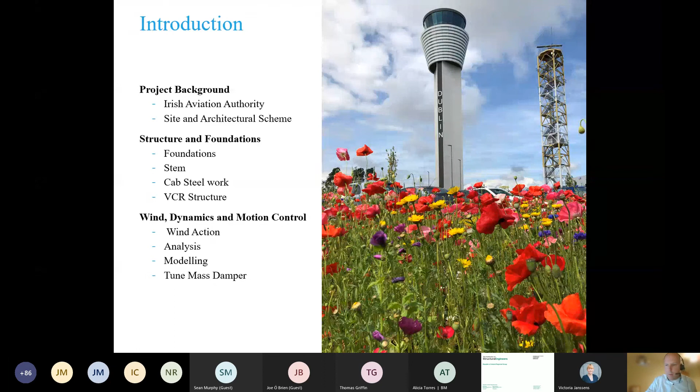In terms of the client, the Irish Aviation Authority, they're a commercial state-sponsored company. The Irish Aviation Authority control all the aviation space around a large swathe of the Atlantic - 450,000 square kilometres of airspace - and they effectively control 90% of the east-west aviation route between Europe and America. It's a very important air traffic service they provide. They also regulate safety standards in Irish aviation and provide safety consultation to aviation authorities globally.

Before that, in terms of the purpose of a visual control tower, the nature of air traffic control work is in two parts. One is...

Sorry, just getting some feedback there. Thanks, on mute, thank you.

Air traffic control is in two parts. You've got the guys who cover air traffic from navigation systems, and then you've got the visual guys who work from the control tower and control the space around and above the aerodrome. Once a plane comes in close to landing or taking off, they're transferred over to the VCT guys. They not only rely on navigation systems, but visual contact is very important for an air traffic controller, hence the need for a good quality air traffic control tower, especially in a very busy airport. The primary objective is to maintain appropriate separation between aircraft.

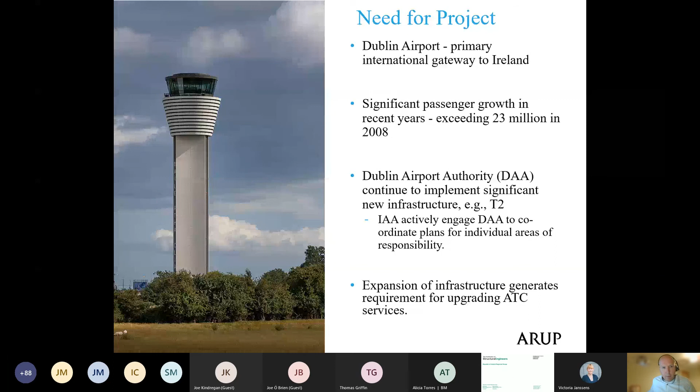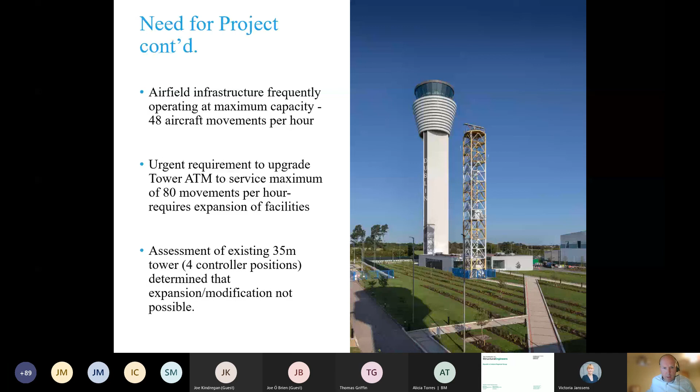The number of air movements per hour was about 48 at that time, and they were now looking to move to an 80-movement-per-hour facility. The question was whether the existing tower at the aviation authority could work with this new demand for increased flights, and the answer was clearly no — they needed a new tower.

So the Irish Aviation Authority launched a competition, an architect-led competition for a new tower. It was a very good brief, but some of the key words from it: it had to be safe and efficient, a unique and world-class visual control tower, with an optimum working environment.

The Irish Aviation Authority really put a lot of investment and value in their air traffic controllers, and they wanted the best-in-class facilities for those important workers. They also wanted a tower that would respect the relationship with the wider environment — the existing control facilities, the wider airport, and the area and vicinity around North Dublin.

They wanted best-in-class ATC service and a unique identity for the tower, not something overly elaborate. There are lots of very elaborate control towers at airports around the world, but the brief was for something simple and elegant that provided a focal point for people arriving in Dublin.

So the team did quite a bit of benchmarking, looking at international facilities and control towers, and a number of projects were examined. Arup had just completed the new control tower at Heathrow.

This was a different type of tower, and its structure was largely dictated by site conditions. The cab was a good example of a good facility, a good and workable design. The team looked at this project in detail, and that started the concept for what we were doing in Dublin.

I'd like to acknowledge the key input from our aviation team in the UK, particularly led by Richard Matthews. Richard has led our global aviation business for some time and has recently retired. I want to take the opportunity to thank Richard for his valued input into this project — he's mentored the team and always been available to give us the best advice. Our team and our client really appreciated that, and I want to wish Richard the best of luck in his retirement.

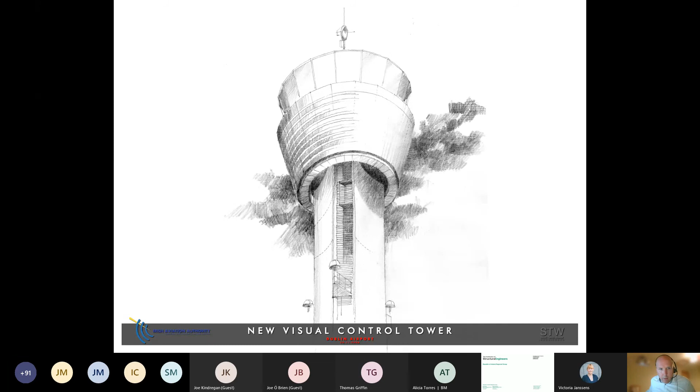These are some images of the Scott Tallon Walker design scheme — some of the early concepts, sketches done by Michael Tallon and David Cahill at Scott Tallon Walker, including early concept sketches through the pavilion building, looking up at the tower.

So just a little bit about the site itself. It's located close to Dublin Airport, and in 2006, when the need for the control tower was emerging, the Irish Aviation Authority undertook a study of optimum sites and a number of options, as well as the height of the tower, given the position of the new runway and the expansion of the airport. That study determined the height needed to be about 80 meters, centrally located in the airfield, and close to the existing air traffic control facilities was advantageous.

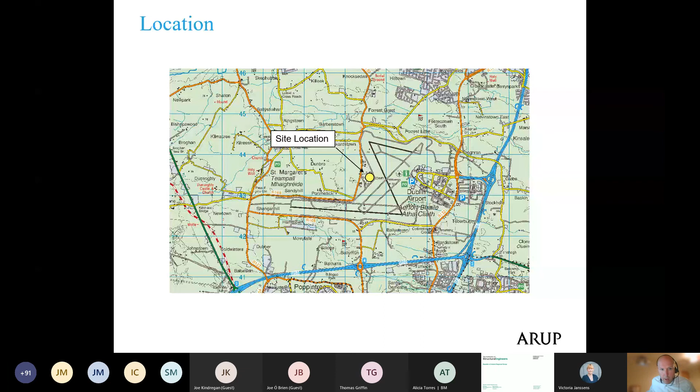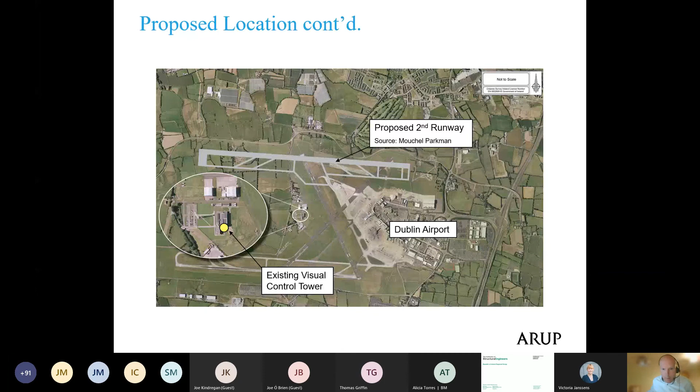So the site chosen for the tower, as you can see the yellow dot in the middle of the screen, is directly beside existing conditions, and centrally located close to the existing runway, and very central to the second runway nearing completion on site. So it's centrally located in the airfield, giving good optimum sight lines across both runways and the aerodrome, or the area around the terminal. The other advantage of that site is that it's all landside at the moment, which is hugely advantageous to anyone working in airports, as going airside is a whole different set of difficulties from a construction point of view. So it was great that we were able to do that on a landside site.

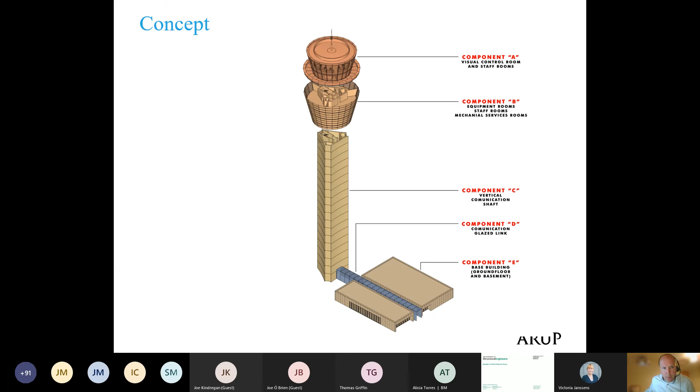Then to describe briefly the architectural scheme, there's a number of components. The first is the base building, which houses predominantly a lot of the plant and equipment for the building, but also has manager offices and meeting rooms. That's linked by a tunnel, a services tunnel in the basement, and a bridge at the upper level, to the vertical communications stem, which supports the cab, containing a lot of the M&E plant for the upper VCR room, some staff facilities, toilets, meeting rooms, and then the upper VCR, which is where all the magic happens in terms of air traffic control.

Then in terms of the plan, in the basement of the pavilion building a lot of the plant and equipment is located, linked by service tunnels and service risers up through the stem and up to the cab. There's quite a lot of plant and equipment here because of the critical importance of this type of building, so if a system goes down, there's always a backup system, and a lot of protection to those systems as well.

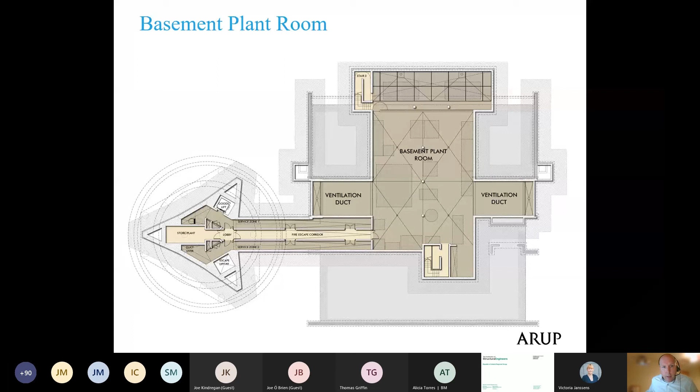So a lot of flood protection around the building was introduced. We raised levels and bunded all areas going into the basement, and within the basement, if there's any kind of leak, there's a number of pump stations to get rid of any water that leaks in. So lots of safety systems built in.

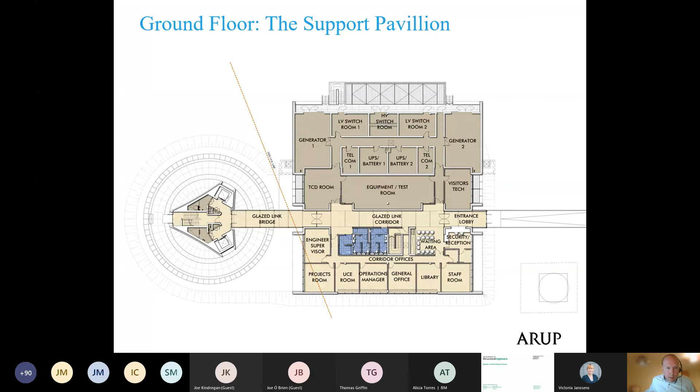And then at the ground level, you've got electrical equipment, backup electrical generators, meeting rooms, and the link bridge back to the main stem of the tower. The main stem then has two lift shafts, stair core, service risers, and circulation space.

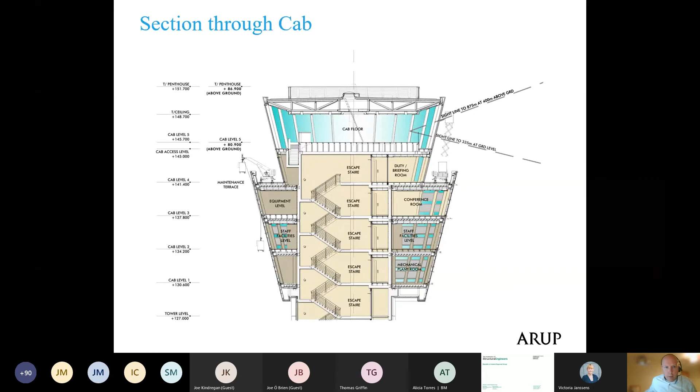And then at the upper section of the tower, you've got the VCR at the very top, with optimum sight lines set to the runway and critical points in the aerodrome. Below that, you've got security to access the VCR room, meeting rooms, and toilet facilities. At the level below that, various staff facilities, and at the lower levels, plant and equipment, and also IT racks supporting the vast array of IT equipment up in the VCR room.

I'm not showing all the plans at every level, but this is just a layout of what the VCR room looks like. It has 11 stations for air traffic control staff, and within the center area you've got the watch manager station, which looks out over the operation of the room, linked by a stair from the lower levels.

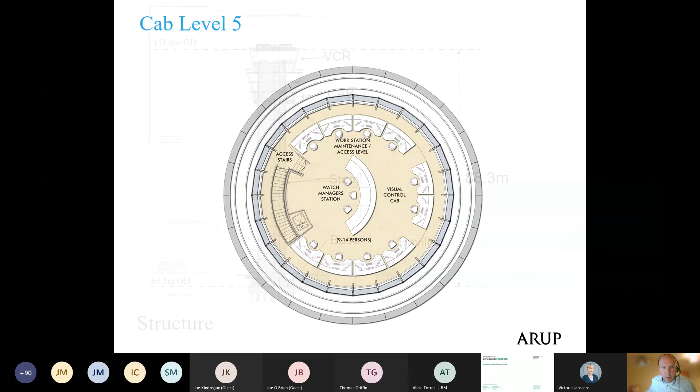Moving on to the structure scheme, the building itself is the base building, which is the pavilion - a single story flat slab structure over a single level basement, linked by a basement corridor and a link bridge. You've got the stem of the building, or the concrete stem, which rises up and supports the 4-level cab structure and the 2-level VCR structure above that.

I'll just describe those individually in the next few slides.

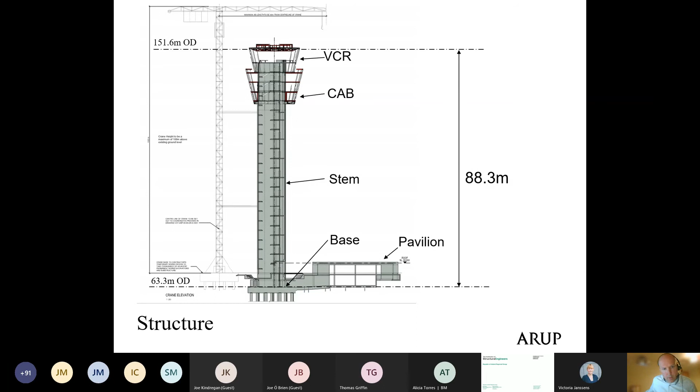The tower itself is 88.3 meters from the top of the raft foundation to the top of the roof steel, which we believe makes that currently the highest occupied building in Ireland - I'm sure it'll be soon overtaken. The tower crane used to construct the building was a 100-meter tower crane. It was self-supporting, and the position of that was carefully located and agreed with the regulator and the aerodrome or the DAA staff as well, to ensure it didn't affect any of the flight paths in the area.

We then backed that up with a geophysics investigation and some rock probing to look at the condition of the rock. What we found was that the rock head was really variable across the site in a very short distance. Aligned with that, the top of the rock was weathered, but also layered with a lot of bands of mudstone. So what we concluded was it was in a geological feature, an area of two different types of rock meeting, and it probably wasn't the most ideal site to be landing an 88-meter tower, but we had to come up with solutions around how to get that to work.

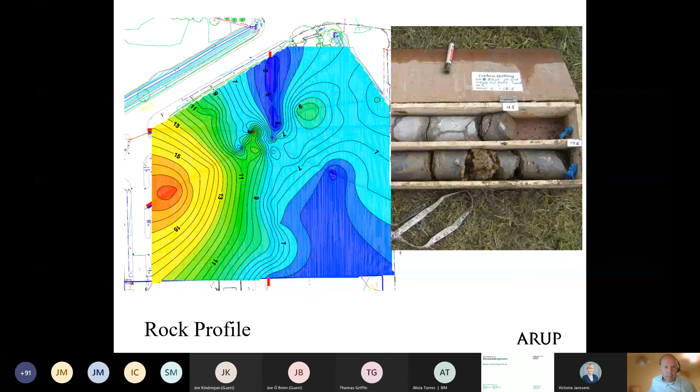So the idea was that we would over-drill the piles into the rock to make sure we got into a very good base layer. We also had an RE on site, and his basic job was to inspect the base of every one of those piles that went in. A camera was dropped down. If there was any doubt about the condition of the rock, probes were put down through the rock to further check the condition, and if we had to drill further, that was instructed on site.

The slide here shows on the bottom left the varying lengths of the piles over the base of the tower. Some were in the region of 5 to 7.5 meters. At the greatest, the highest length, I think they went up about 20 meters. Whilst from a basic load carrying capacity that was something solvable, it did come into our reckoning around the dynamics of the building, which Salam will go through with you in a few minutes, and how to model that. It became quite tricky, and it was important that we got that right.

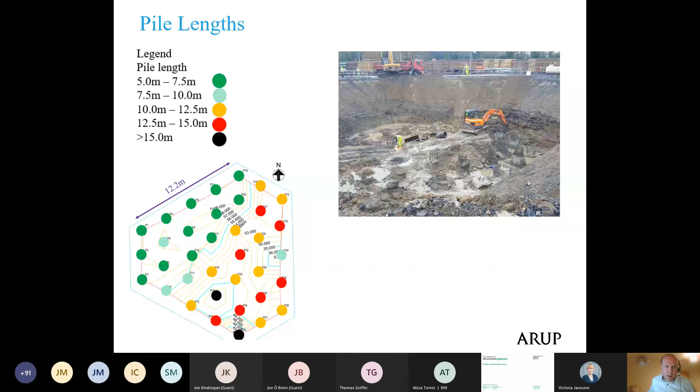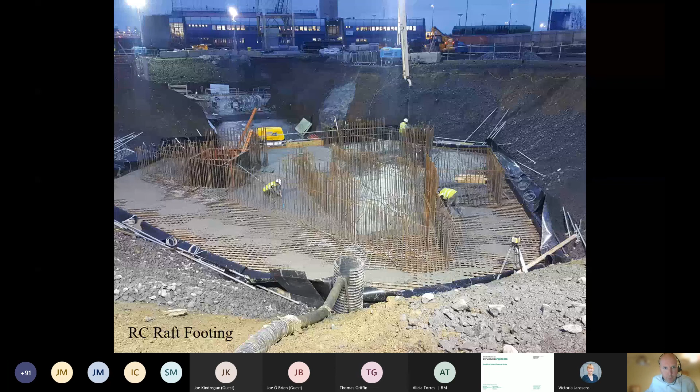So then the stem base is wider than the actual stem itself, and the reason for that is we wanted to try and transfer load out to more piles to actually stiffen the base and to really reduce the movement and control the highest stresses. You can see the dotted line is actually the profile of the stem as it's coming out of the ground, with the stem itself, and then coming in from that inboard at ground level.

Then the stem itself, at its minimum, the external walls are 300 mil thick and the internal walls are about 200 mil. The design itself, or the geometry of design, worked out very well because we ended up with these triangular shapes at the extremities, which is really where you want them from a point of view of stiffening up the stem and controlling that motion, and you have mass in the high stressed areas of the structure.

Some other points to note is that the walls themselves were not straight. There was a curvature, I think a 52-meter radius curvature, so that had to be built into the formwork for the tower.

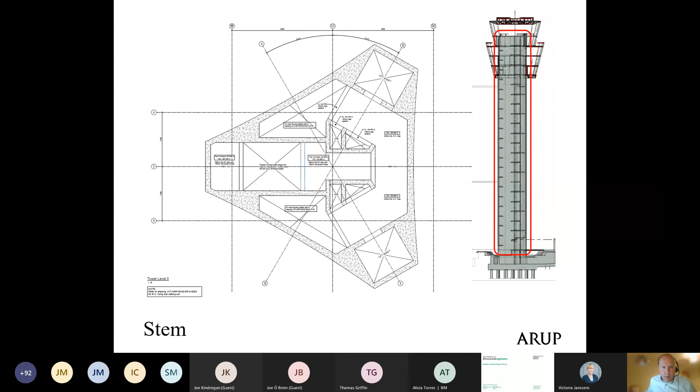So the stem itself, these are photographs of the stem under construction. It was a slip form construction, and we worked with the contractor to design the reinforcement to allow the slip form to go 24/7. Once it started at the bottom it kept going from bottom to top, at a rate of about 6 to 8 meters per day.

We also worked with the contractor to have a number of different types of concrete grades available. If they wanted to slow down the rate of the slip they would introduce a different mix, or if they wanted to speed it up they'd have a number of different mixes to match the speed they wanted to go at.

As the slip form was moving, it was also laser guided from a point of view of tolerance. I think in the end we got it within something like 10 mil of tolerance, which was amazing for the height of the building.

The other thing that happened when we were slip forming, with just the last few meters of the tower getting to the top, we got hit with a really bad snowstorm. Whilst the cab itself was heated, the slip form was heated and temperatures within it were being controlled, we just couldn't get a supply of concrete to the site, and they had to stop it for a few days, which was unfortunate because stopping and restarting a slip form is quite an operation. That was just a piece of bad luck on the project.

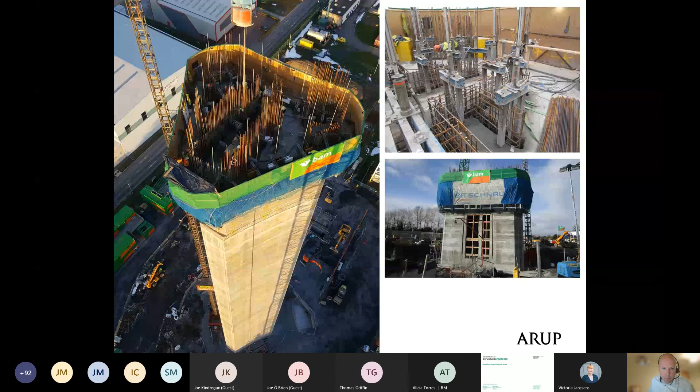So moving up the building into the cab structure, which is the 3 levels at the top of the tower here.

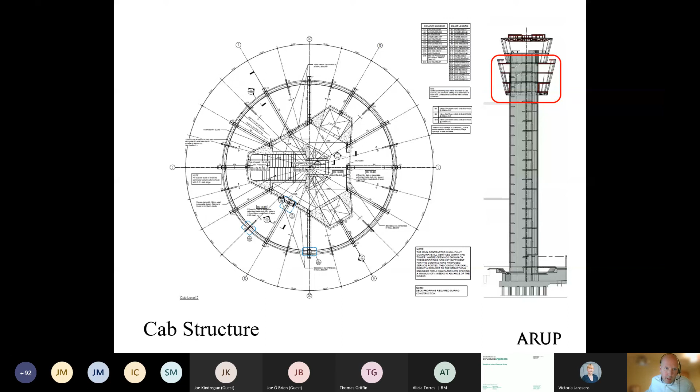The cab structure itself is a series of 12 Vierendeel girders that are cantilevered, story-height Vierendeel girders that span from the concrete core wall out to the outside ring, and in cross section...

That's just the basic structure you can see, this is the core wall on the left with the story-height Vierendeel girders spanning from the core and then transferring load by means of push-pull back to the core walls, and vertical load transferred to a corbel located at this point, radially located around cab level 1, as we call it.

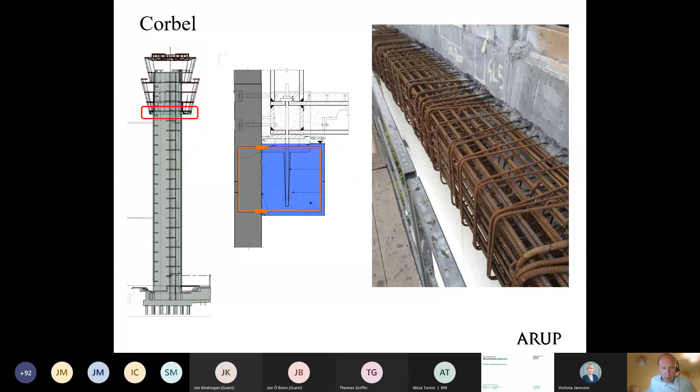The base of the Vierendeel is supported by this corbel, and because we went to a slip form type of construction, we had to come back and cast that corbel after the wall was constructed. So we had to come up with a detail to include couplers within the wall, and then stitch on a series of U-bars back into the core wall once the slip form was complete. That design is meant to load back into the core once the weight of the structure comes on.

In terms of the design of the steelwork, because of the nature of the building, we determined that from a redundancy point of view this was a consequence class 3 building. The consequence of a member failing meant we had to look to alternative load paths to make this work. We looked at what would happen if a corbel failed, or a portion of a corbel failed, or a section of a lower Vierendeel collapsed - where would the load go?

We ended up coming up with a solution to introduce, for the redundancy case, a second Vierendeel at cab level 2. So in effect we ended up with a double Vierendeel, such that if the lower one collapsed in a redundancy case, this upper Vierendeel would actually work and support the building. We also introduced a series of vertical braces in the external perimeter to allow the lower level to work as a kind of ring beam that would also transfer that load.

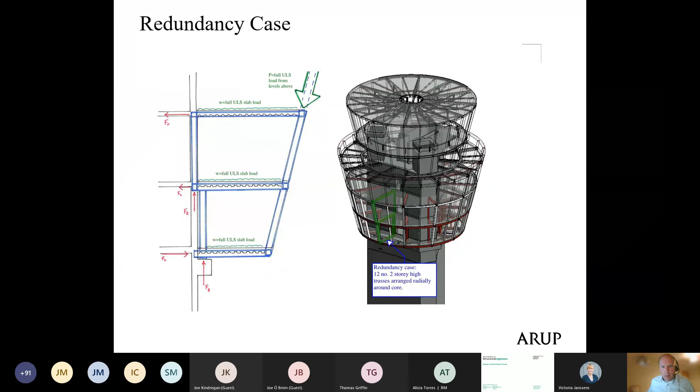So just looking at what that looked like from a fabrication point of view, we had our base. This is the base Vierendeel, which came and was bolted together on the ground and lifted in place, which I'll show in a minute.

This transferred the load vertically, pushing vertical load down at this point, and then a push connection back to the wall, and a pull connection at the top, achieved by means of a welded connection to a cast-in member in the upper wall. A second Vierendeel was then bolted and welded at the top here.

These were site welded connections, which took a lot of work and detailing to get right, and every one of them was fully tested on site, all the welds, with a lot of quality control put in place to make sure that they were right, and the weld procedures were fully signed off.

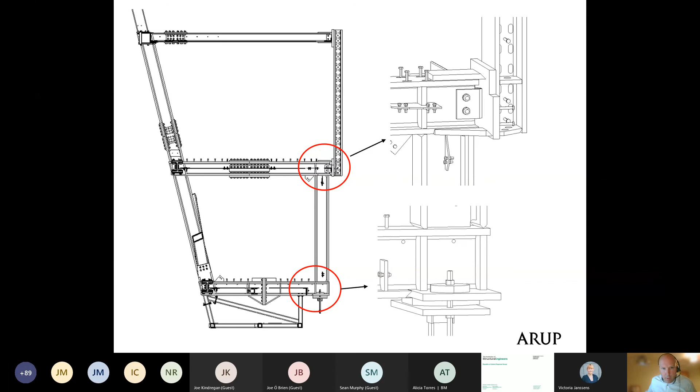This is actually the base of the Vierendeel as it lands on the corbel, and again we wanted to ensure that load was located right in the center of that corbel. We didn't want it off center, and also as the load comes on, we wanted to allow that rotation to happen without introducing additional moments on the corbel.

So we introduced a curved bearing plate underneath the connection point to ensure that we controlled how that load was applied onto the corbel. And the detail then also allowed for tolerance, in or out, or up and down, to get it exactly right.

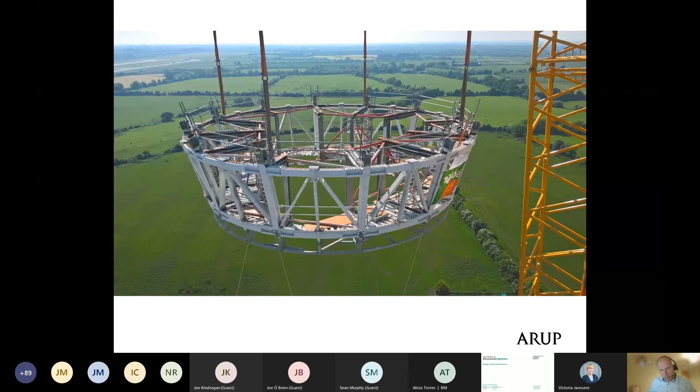This section was then lifted in one unit, lifted up over the top of the tower and dropped onto the corbel. Again, we looked at a number of analysis cases on that to ensure that ring didn't move out of place as it was dropped in, that it was stiff enough to do that job without going out of tolerance.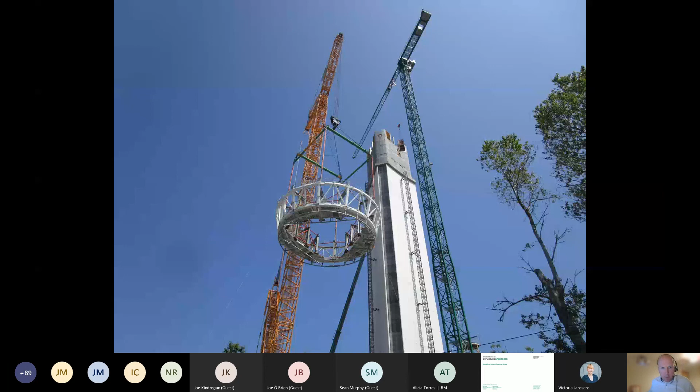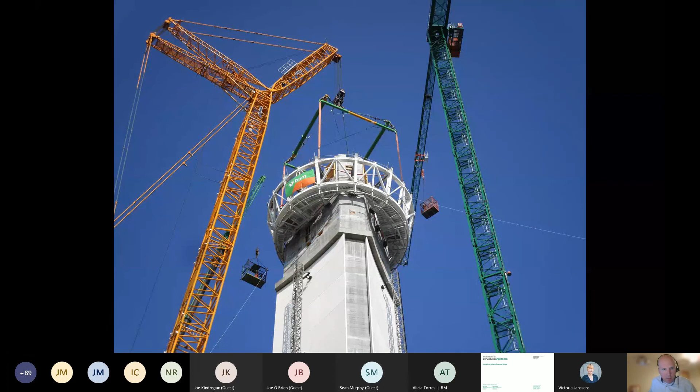Again, this was more photographs of the ring itself being dropped down and guided into place onto the corbel. Once that was in place, the next section of Vierendeels were bolted onto the lower one and then welded back to the concrete core.

And then the next lift of steelwork for the cab was then bolted above that, and that formed the levels of the cab.

Then moving up from there, we have the VCR structure, the upper cab and VCR structure. The structure itself for the VCR consists of 24 300 by 200 box sections. They were fabricated box sections rather than off the shelf, and there are reasons for that, which I'll come to in a minute.

There are 24 inclined columns which support the roof structure above. Those columns are supported on transfer beams, which span from the central core back out to the lower cab structure and Vierendeel trusses below.

The roof structure itself of the VCR room is an 18-meter span roof structure, with trusses spanning from inclined column to inclined column, with a central ring beam in the middle to enable the connections to happen, but also to allow an opening to access the roof above.

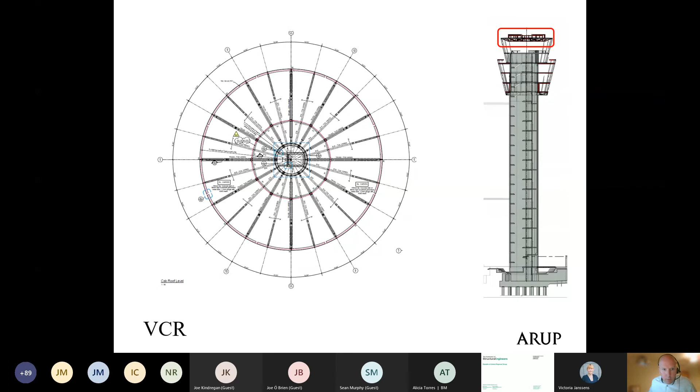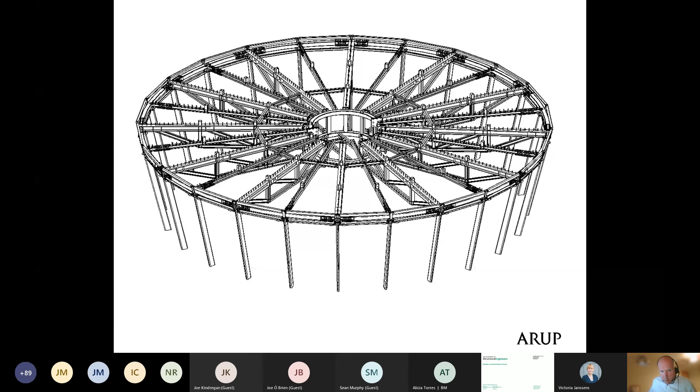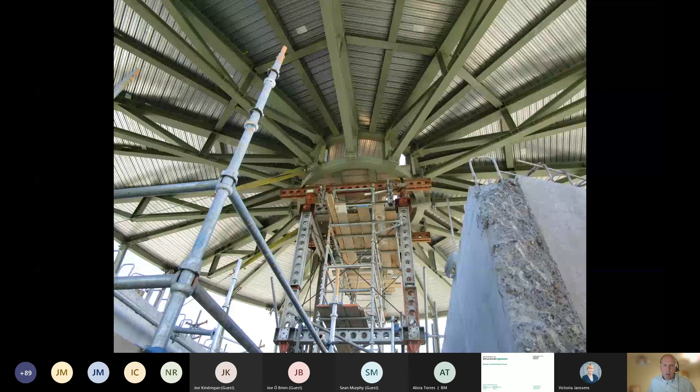It was difficult to find an actual image that showed the roof structure, because once that was in place, the contractor put a deck system underneath to allow them to start to fit out the array of ceilings, lighting and services that go into this structure. So it was never really opened up as a wow moment to look at that steelwork.

But this is kind of what it looks like now. These are the inclined box sections - 300 by 100 box sections, sorry, I said 200 a minute ago - 300 by 100 box sections supporting the roof above.

Now, these box sections are really important because not only do they support the roof and laterally support it, they also support the glass for the building. You'll see there's no mullion there, so the tolerance on that steelwork had to be really tight - I think it was within 5 millimeters. So there was a lot of control in setting out and how those were positioned.

They also contain a lot of the conduits and wiring that go from the lower level up to the roof level, to the communications equipment up there, and to allow for future cabling to move up to the roof.

So we did a lot of work and testing. In fact, with the facade guys, they built a full-scale mock-up of that steelwork in the fabrication yard in Istanbul. The fabricators were a company called Metal Yapı - they also did the facade, based in Turkey - and the team spent a number of days out in the fabrication yard checking and testing that this all fits together and works. Facade testing, load testing, and water testing was also done on these mock-ups.

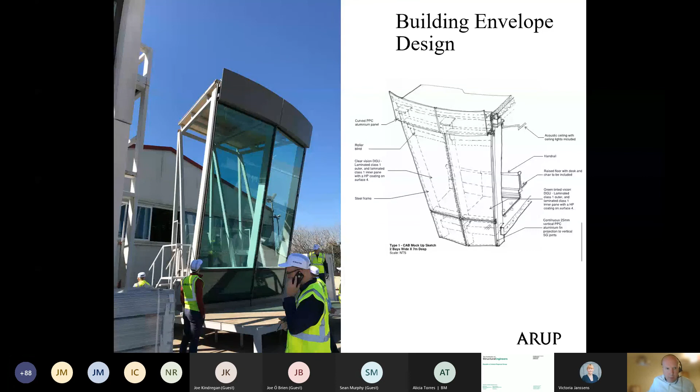Another important part of the project is the M&E - it's a very heavily serviced building. So a lot of the structure was set out around this. Our immediate scheme was looking at whether we could put cross members at the bottom internally in the plant areas, but really the plant areas are nearly like car engines - they're really packed with services, and there's maneuvering space but not much else room for anything in there. That's really what generated the requirement for the Vierendeels.

But again, on the upper levels, the concrete setting out and the coordination of services took a lot of work and effort with the M&E team to get right. It was the beauty of modeling now, and BIM allowed us to really get that coordinated.

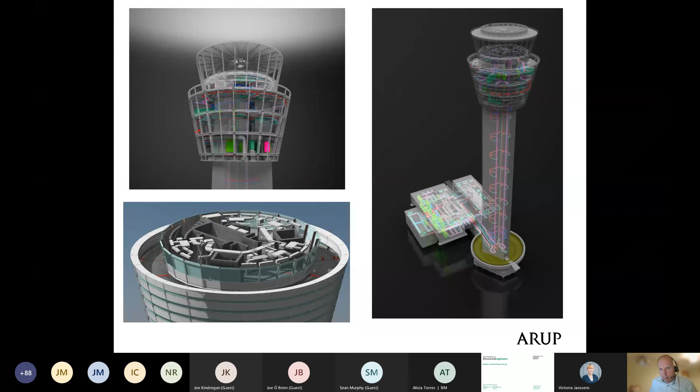Finally, one other last feature was that the lighting guys worked with the client to come up with a concept around lighting the tower, and we worked with them to incorporate the strip lighting within the structure, and the connections back down to the columns. The idea is that these lights can be changed color for whatever occasion.

So if Joe Biden visits Dublin, I'm sure they'll light it up red, white, and blue. This was an image taken last year for Dublin winning the 5 in a row, and it's lit up blue. So it doesn't look like they'll be changing those colors anytime soon. But anyway...

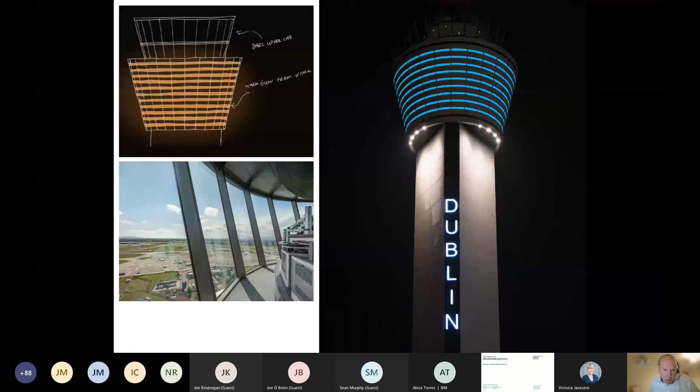So I think that's it from my side on the background to the project. I am now going to hand over to Salam, who's going to take you through, as well as the challenges of high-rise construction and wind and motion.

So we're going to try and do a virtual pass here. I'm going to stop sharing my screen - sorry, Salam. If I can, you can take over. Are you able to share? I don't know what you can see now. I started to share - is there anything visible? I'm trying to work out if that's your screen or Sean's screen. At the moment we can see the Teams window - I think that might be your screen, Salam. Do you want me to share mine, Salam, and I can drive? No, I mean, if you can see this screen where we have loads and deflected shapes, etc., can you see the screen? We can't see that at the moment. Let me try again to share my screen. If you stop sharing - yeah, that's your screen there, can you see it? If you hit the square box with the X on it and stop sharing for a second, and now hit to share again, and just choose - because you'll have a few different options to choose from - select the presentation. Yes, we're in luck, perfect. Okay, very good, thank you.

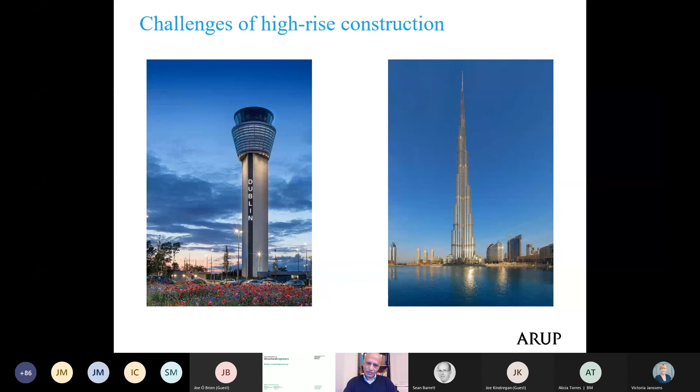So that was the challenge, and we spent a lot of time trying to solve that. Now, if you look at this screen...

High-rise buildings are just vertical cantilevers. So there is horizontal load, wind load in this case, and you can see that the maximum shear force at the base is related to the height. So if the height doubles, the shear force at the base will double. Maximum bending moment is related to the square of the height, so if the height is doubled, the base moment will increase 4 times.

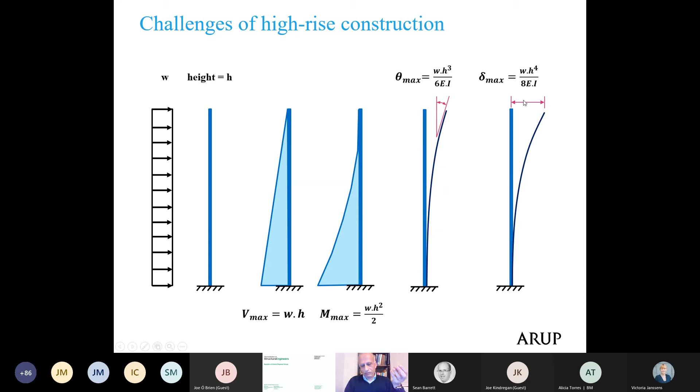Continuing with rotation, maximum rotation at the top is related to the height cubed. But the important thing is the deflection at the top, which is related to the height to the power of 4. So every time we double the height, the lateral deflection will increase 16 times. Of course, horizontal acceleration, related to comfort at the top level, is related to this displacement. That is the essential part we need to solve in a control tower, and in every high-rise building.

So in Dublin, no earthquakes, fortunately. We have, on the other side, very good wind loads. A wind load will have a mean variation of speed and pressure, and fluctuations, which are the gusts, and we need to consider that in the design. So if there is a high-rise building with wind flowing in one direction, the building can move along the wind in the along-wind direction, or perpendicular to the wind in a crosswind direction. It can also rotate around the vertical axis in a torsional mode.

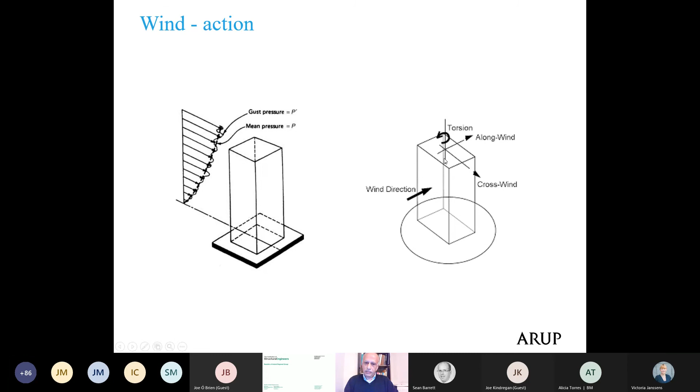So there are a few odd consequences of wind affecting different profiles at different speeds. One of them is galloping. In galloping, if we have a cross section with sharp corners, say a rectangular section, or in our case a triangular cross section, inclined wind can cause lateral movement, in this case in the Z direction, and this movement creates a velocity component in that direction. So the apparent attack angle of the wind will slightly change, and this will start a reaction that you will see in this video.

So this is a wind tunnel, and there is a triangular section. You can see the wind blowing from left to right. At a certain angle, this cross section is affected by galloping, and you can see the vibrations. Just now, the wind angle relative to the cross section has changed, and nothing happens.

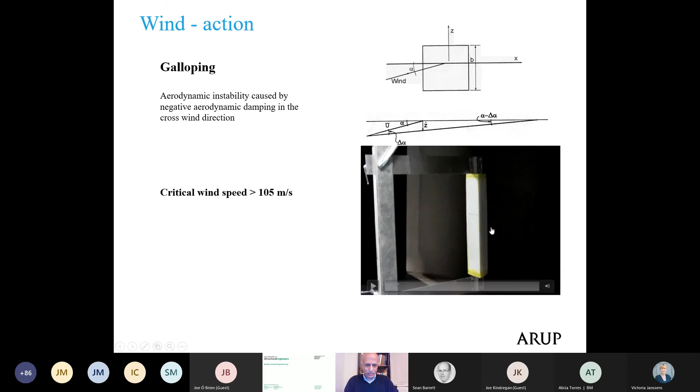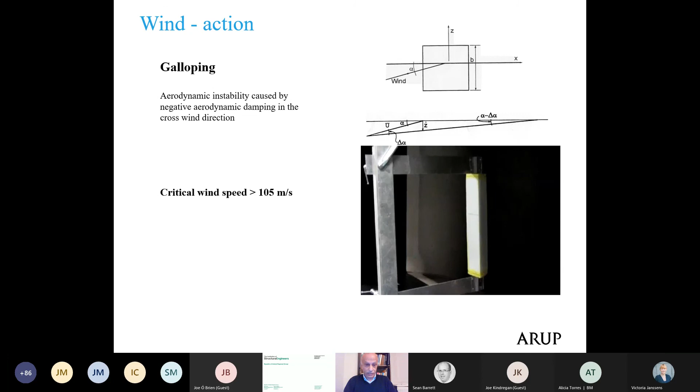But because wind can come from any direction, that's not a very good solution. The good thing is that galloping can be calculated to a reasonable degree of accuracy. Initial calculations proved that the critical wind speed is more than 105 meters per second, which is okay. So the conclusion is that galloping will not be a major factor affecting the design of the control tower. We have vortex shedding as another phenomenon.

Unlike galloping, which affects cross sections with sharp angles, vortex shedding affects cross sections with smooth surfaces, circular for example, where we have mostly laminar flow around the circle. Wind comes from left to right, and at the back there is separation. The laminar flow stops, and there is separation between the wind flow and the cross section, resulting in negative pressures and vortices.

These vortices develop at both sides, top and bottom of the circular cross section, at a certain frequency. This frequency is related to the shape of the cross section and to wind speed. Other factors, like roughness of the surface, are less important. If the frequency of vortex shedding generation matches a natural frequency of the structure, then the structure will move.

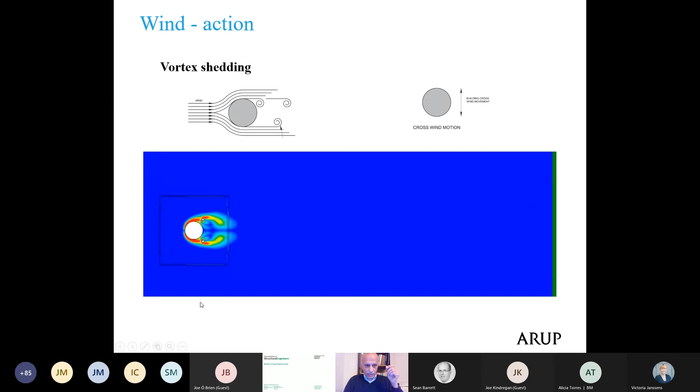Below is a numerical simulation, but it is realistic. You can see when wind flows from left to right, that at low wind speeds nothing happens. As wind speed increases, you can see the generated vortices and the resulting lateral movement of the structure.

There are some eye-opening experiences resulting from that.

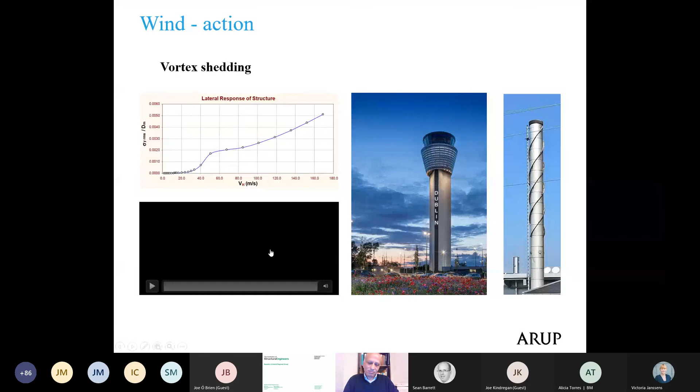The calculations are very approximate. There is, until now, no closed form solution to it, but this is what we expect. Traditionally, in chimneys, one solution is just to try to spoil the laminar flow, the even smooth flow, using these spirals. But of course this is difficult to apply to a control tower. This video is just a demonstration of what can happen.

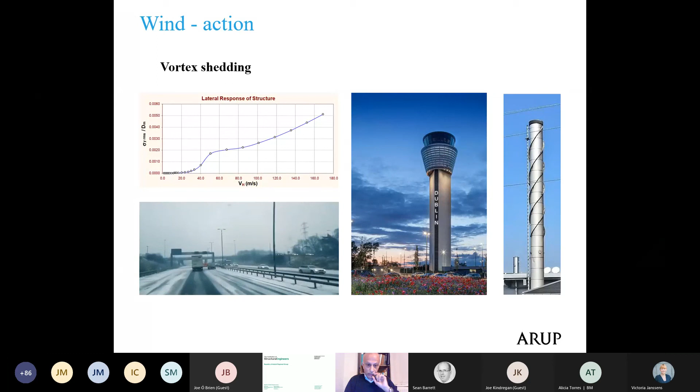So if there is a resonance, a matching in frequencies between the generating frequency of the vortices and the natural frequency of the structure, then this is the result.

As defined in the brief, and that was very important for us to satisfy, we need to provide optimum working environment for the air traffic controllers. For lateral vibration due to wind, there is a standard, and the peak acceleration is determined by defining the fundamental frequency, the first natural frequency of the structure. There are two curves defined, one for offices and one for residentials. Our aim was to have a performance much better than an office, and as close as possible to a residential behavior.

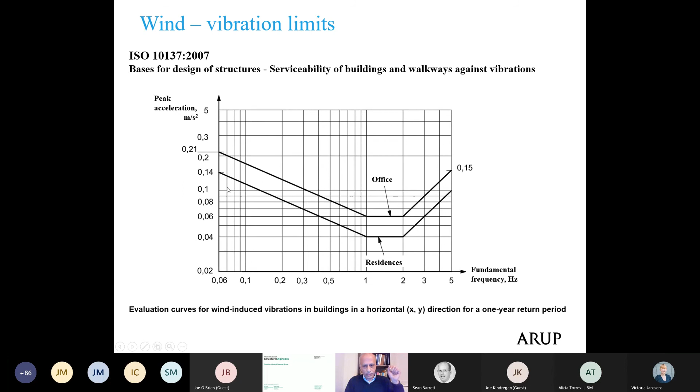The only problem with this curve is that at that stage we don't know what the natural frequency of the structure is, so we don't know where we are on the horizontal axis. That was our next aim, finding the natural frequency, through which we can then define the peak acceleration, in order to satisfy the comfort criteria. To do that, to get the modal properties, there are two items.

First, we need to find the natural frequencies with their mode shapes. Second, we need to find the modal masses, the distribution of masses as they move in that mode shape.

Looking at the basic components, we have a structure, so we know the dimensions of the structural elements, so we can find the stiffness. We have a foundation, a piled foundation. All of that is fine, but all of that is founded on very unclear ground conditions. So that was our first challenge, to estimate ground stiffness.

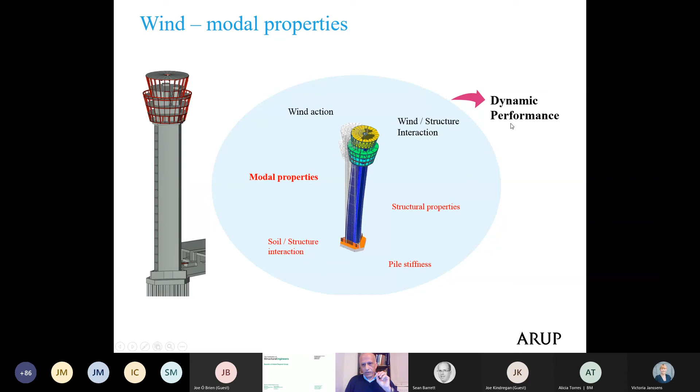Next, we need to move and see the structural stiffness. By doing that we can estimate the modal properties, linking these properties with wind action and finding somehow the relationship between the two, the wind structure interaction. Then we can find the dynamic performance of the structure.

We collected all possible information around the control tower area on the ground conditions, just trying to estimate the pile stiffness, and we ended up with such diverse results. From a minimum stiffness to a maximum stiffness, there was nearly a factor of 10.

So to say for sure, at the design stage, where our information about the actual ground conditions was limited, what the ground stiffness was, was very difficult. That was the initial reason why we ended up with two solutions, an upper and a lower bound solution. We picked one extreme and the other, and we worked from then on in two parallel lines.

That is the workflow, which was a result of very good coordination between the structural and geotechnical teams working on this project. So we have our structural model with the major structural components, all with their reasonable estimate of stiffnesses and material properties, dimensions, etc.

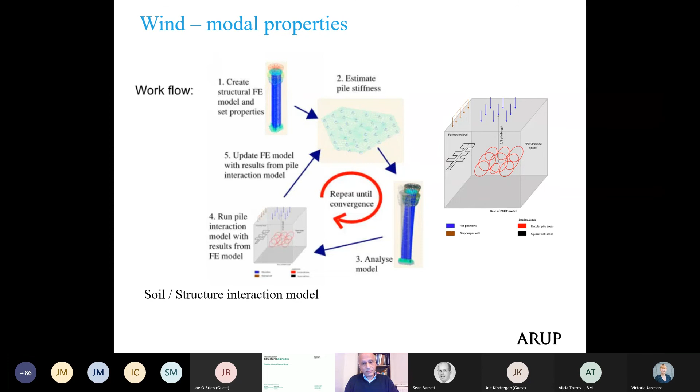It's a three-dimensional model, a half-space elastic analysis with layers of different properties. So that is the cycle we took: getting results from the structural model, feeding that into a three-dimensional geotechnical model, getting soil properties, getting as a result revised pile stiffnesses, and feeding that again into the structural model, going into loops until we have converged results. Then we say, okay, that is the model that faithfully represents this condition as best as possible. So that's one side. We did two parallel studies for both extremes, the upper and lower bounds.

Then we moved on to the other unknown, which is the stem. During construction, this stem is affected by wind load. As a result, at certain levels, if there are high wind speeds and high wind pressures, it can crack. This is just one diagram of the studies. This diagram on the right side shows all the parts that are in tension due to wind action.

And a zone at the bottom, you see this different color, the light color, green, yellow. This is a highly stressed area in tension, so this area can crack. This area is very close to the corners where we have our stiffness, where we have maximum area of concrete. If this area cracks, then we will end up with only the effective area of the reinforcement, so we will have a sudden drop in stiffness due to that.

So that would feed also into our lower bound model, or if it is not cracked, it feeds into our upper bound model. In this case, we used a software called AdSec, which does that. It's an Oasys software, which is quite nice and quite useful.

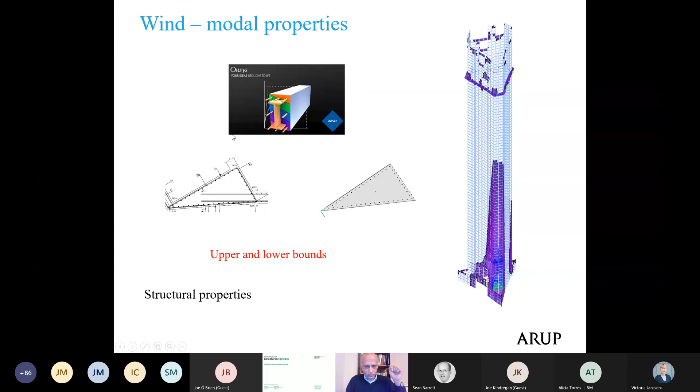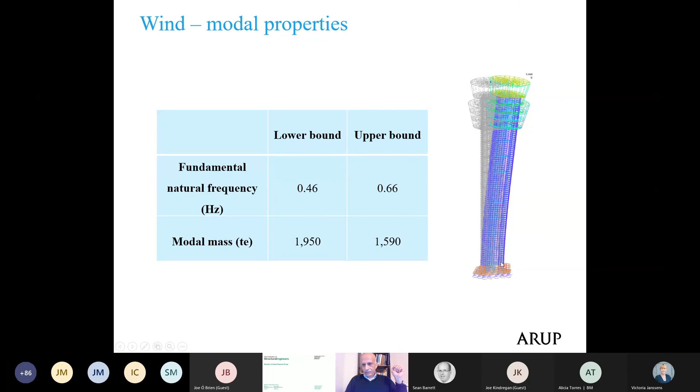So the two models, lower and upper bound, have different natural frequencies and different modal masses. That's the first mode of one of these models. Now, with this information, we were ready to complete and issue our specifications for the wind tunnel test, because now we have the modal properties, in fact properties of the control tower. In this specification, we specified the aims of the wind tunnel test.

So at the end, we need to understand if vortex shedding is important and how the damping affects the dynamic performance, let's say the comfort at the top level of the control tower. Now we move on to the wind tunnel test. This test was made in the UK. RWDI is a well-known company, and this wind tunnel test requires the creation, in this case 3D printing, of a very lightweight and stiff model.

In this case, that was PLA plastic. You see these little holes, these are taps where there are tubes inside feeding into pressure sensors. So at the end, we could have an understanding of the distribution of wind pressure coming from different angles. So we specified a 5 degree angle between one run and the other.

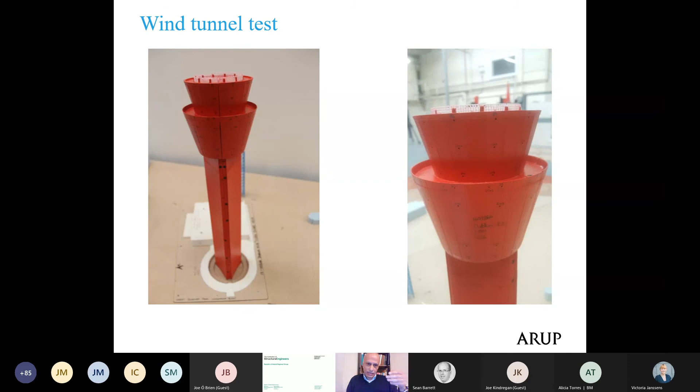So that's the test sample with the immediate surroundings. That's the wind tunnel, and that is the setup. This lightweight structure is supported on a shaft that has 2 levels of strain gauges that will measure strain at these levels. From that we can measure bending moment and shear force in all directions. All of that is supported on a gimbal that can measure twisting moment, torsion.

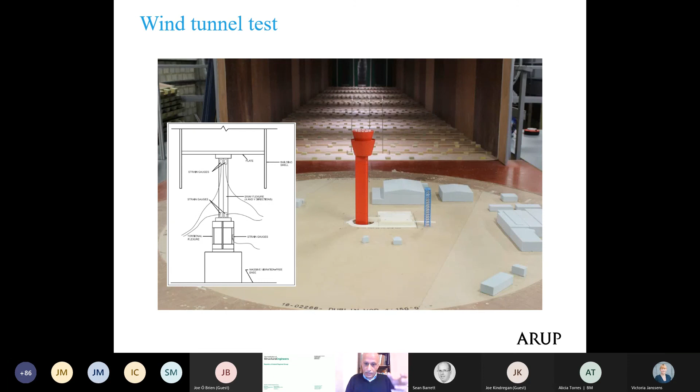So in fact, we can get 6 components as results, as reactions. All of that is done, and we have the results of both of the 2 models, the lower bound and upper bound, with 2 stiffnesses. The 1% damping, which we expect is the damping of the building as it is. It's a reinforced concrete building with very little partitions, so it's just a pure structure. There are very few elements that can absorb energy, so this building has very little damping.

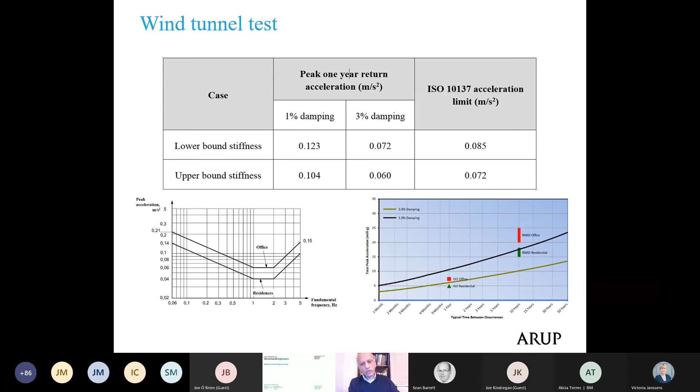So the conclusion is that we need to do something. This building will not satisfy the client's brief. It will not provide a comfortable and optimum working environment as it is. So now we need to move to the next step in our journey.

Of course, we can get all the pressures, etc. So the next step would be...

And this exercise is part of the journey that all of us took. Ultimately, the end user would be the air traffic controllers, and they need to be comfortable and convinced that this control tower can provide a good working environment. They will stay there for hours, concentrating on computer screens and looking outside from the windows.

So our suggestion to the client was, why don't we simulate the possible vibration levels and see what the air traffic controller's opinion would be. So we did that.

So we have a simulation carried out in Southampton University in the UK, and there is a platform supported on hydraulic jacks controlled by computers, and we can feed in any time history of movements.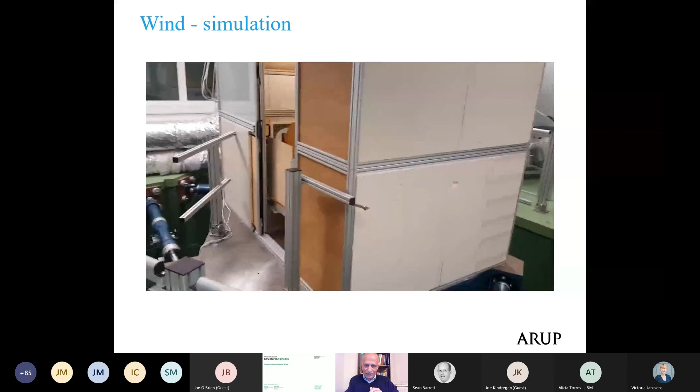And based on the results, this is a nice animation of this room moving. So the air traffic controllers were inside looking at their laptops, sitting on a desk.

And at the end of each one of these tests, they filled out part of a form, giving their opinion about what will happen, about their feelings, and sense of lateral movement.

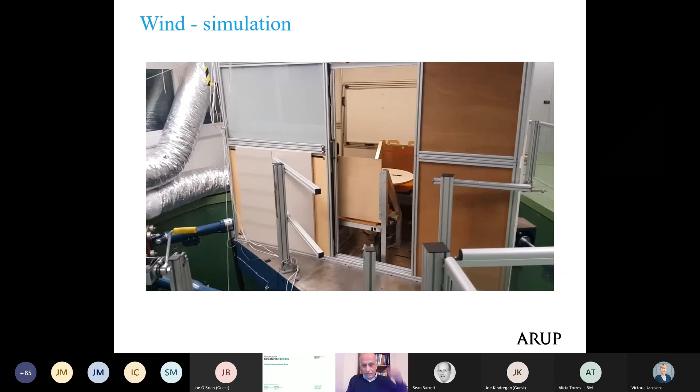The result was clear that 1% damping was not good, and we need to do something. We need to increase that to at least 3%.

So the end result was that we then issued new specifications for a tuned mass damper that requires the tuned mass damper to have a damping ratio between 10 and 15% of the critical damping, and needs to satisfy this damping ratio within this range of frequencies.

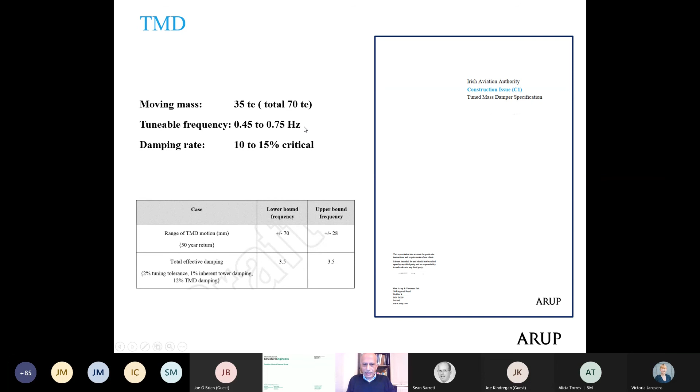We have initial calculations showing that we need 70 tons of mass to do that. And we thought a passive tuned mass damper is the best solution because it's more reliable.

We have limited space, as Sean showed you. I mean, we have very little space in the control tower. So this is where we ended up.

Below cab level 1, it's in level 18 of the stem, supported by cab level 1. So these tuned mass dampers were 2 here and there, suspended from the roof.

Vicoda is the company that supplied these dampers. So you can see a sketch of these dampers.

So they are just a pendulum, inverted let's say, supported at the top in this case. That's the pendulum, it's this mass. It's just steel plates, 35 tons each, suspended from these 4 rods.

And at the bottom, you can see there is a pot, and there is a special fluid, a special viscous fluid, and there are vanes that move with the mass into this fluid, and that's how energy is absorbed.

This is the damper. There are 4 vertical springs, small springs, and these are just to fine-tune the natural frequency of this damper. The rough frequency, natural frequency, is dictated by how long the 4 rods are.

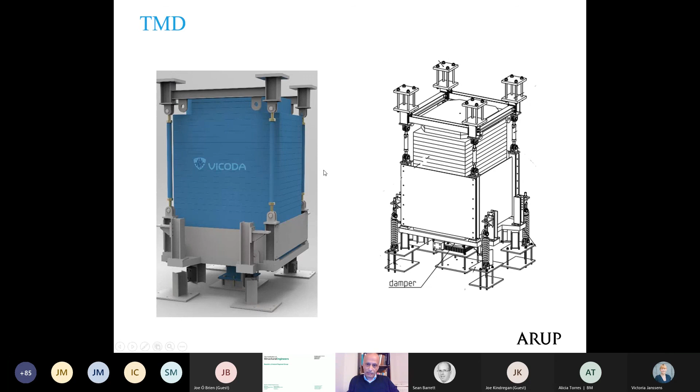So by the time we issued the specifications, we didn't know what the natural frequency of the control tower was because it was still being constructed. We did not have any measurement. We have only calculations, the lower and upper bounds.

So this is how a tuned mass damper works. This is a nice video. So you can see this pendulum.

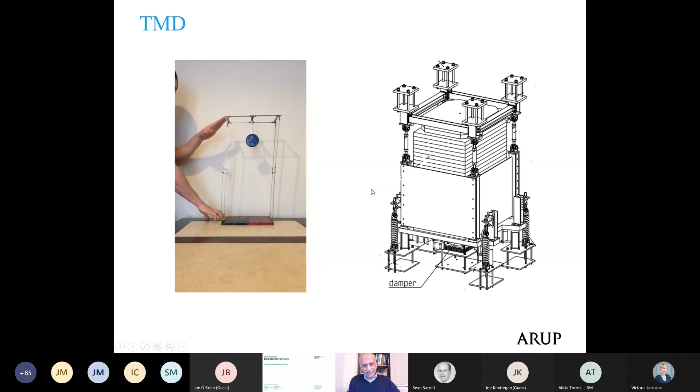So it's a tuned mass damper. If the natural frequency of the pendulum of the suspended mass of the mass damper is made equal to that of the structure, then it will move in the opposite direction. See it again. And the relative movement between the structure and the damper can then be used to dampen the movement. In this case, the damper is only the friction of the vertical rod.

But in our case, we have a slightly better one. We have, in fact, a much better one.

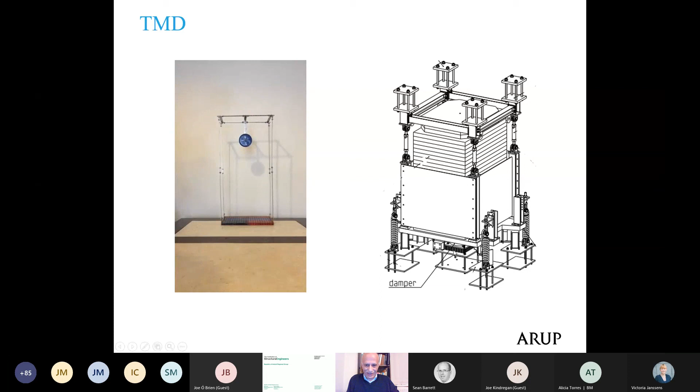We waited until the last moment, when all the mass of the tower was complete, so the control tower was nearly finished before we measured its natural frequency. This test was done with a high technology piezoelectric accelerometer, very accurate, with 2 measurement directions. The results were very close to our upper bound, proof that all the good things happened. We were extremely lucky to end up with the best possible scenario, the stiffest possible tower with the highest natural frequency.

That was really very good, and it's a result of the good workmanship, dedication and quality control of everyone who worked on this project, from the design to the construction, everyone.

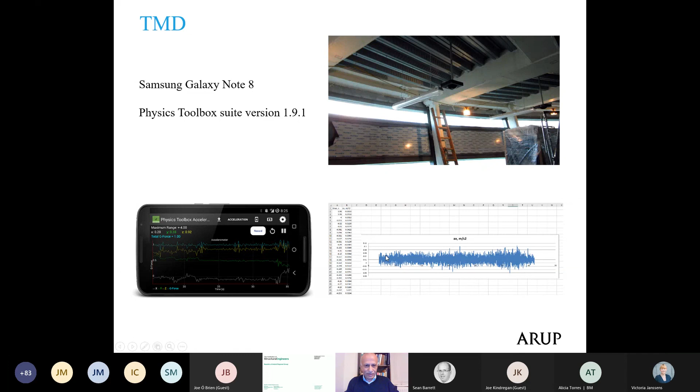So we asked Joe to record this movement. He just put his mobile phone on a flat surface and recorded the movements, saved as a CSV file. With this file, we had an internal competition in the company: can you use the data and calculate the natural frequency? All of that was done before the actual test, before the testing company came and found the real natural frequencies. Using this mobile phone technology, we got reasonable results.

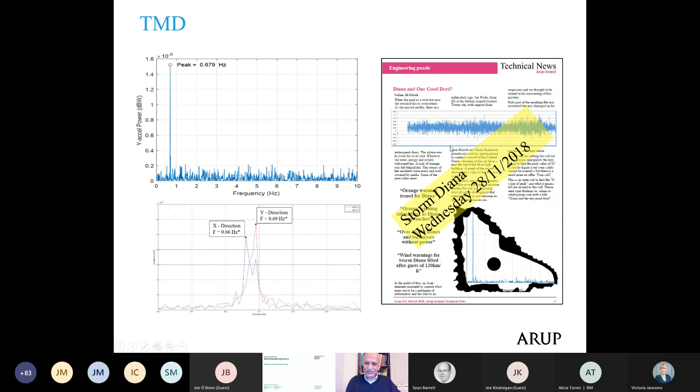That movement happened because of Storm Diana - that was actually the title of the article describing what was done due to Diana. So that was one good outcome of the storm.

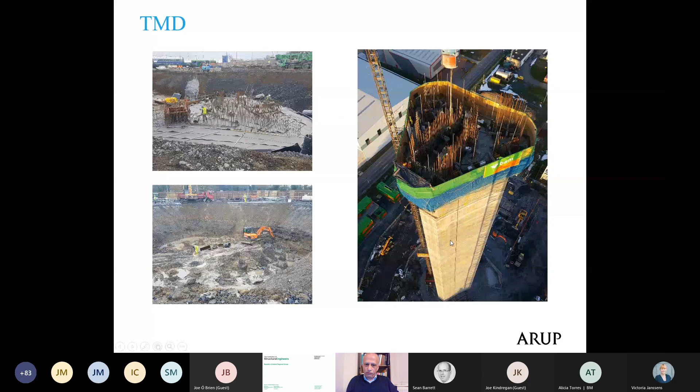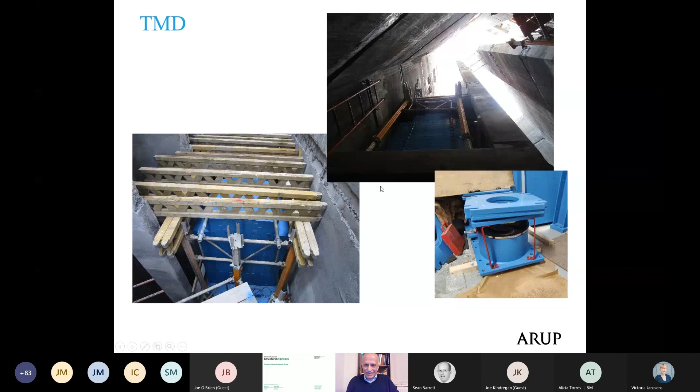This high stiffness was a result that started with quality control - piling, casting concrete, lift the stem, controlling every aspect of design and construction. We ended up with a very good structure. Finally we had the tuned mass dampers arriving on site, because the last clue was the natural frequency. Once we had that, the manufacturing company, like Koda, could manufacture the 4 rods supporting the mass.

Moving 35 tons, times two, all the way upstairs was not an easy task. It was assembled little by little, with chains, hooks and all kinds of tricks used. And here it is now, the control tower, working every day - well, not every day, in fact.

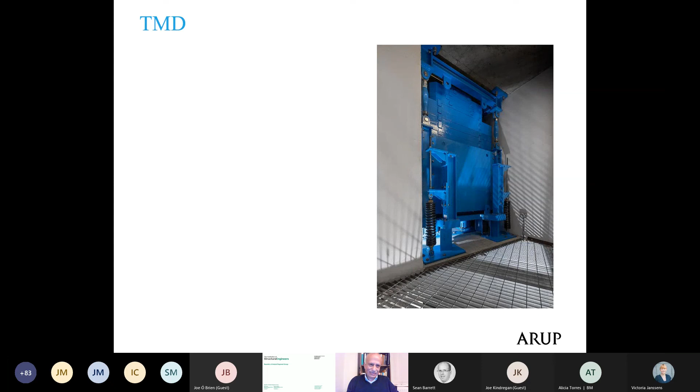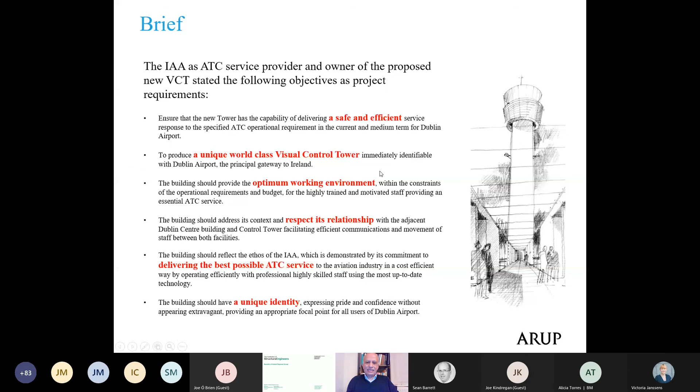We hopefully managed, at the end, to satisfy the client's brief, and from the dynamic side, that was the optimum working environment we hoped to achieve. At the end, I have to thank everyone involved in this project, the structural team, and our colleagues who worked on it, many since 2008. It was a long journey - for many, a 12 year long journey. Thank you for your time and for coming to this presentation. Thanks.